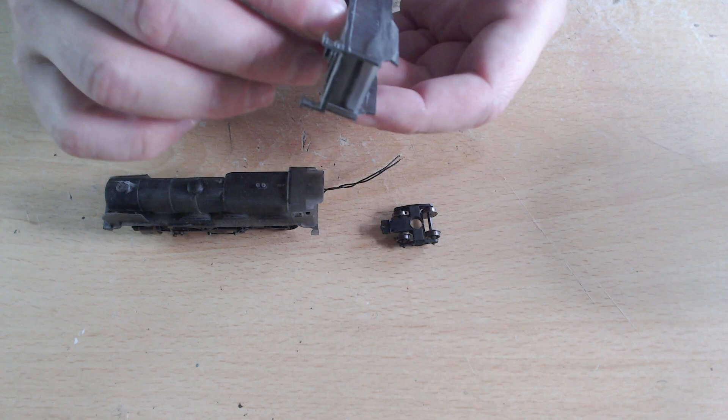This time we're working on a Southern Railway Lord Nelson class, which I've pretty much got ready here to start working on. It uses a Graham Farish 5MT chassis at the front here. I did remove the tender because we don't need that, and the tender is pretty much mostly its own thing. However, it does use some N Gauge Society bogies because it's basically might as well use pre-made parts.

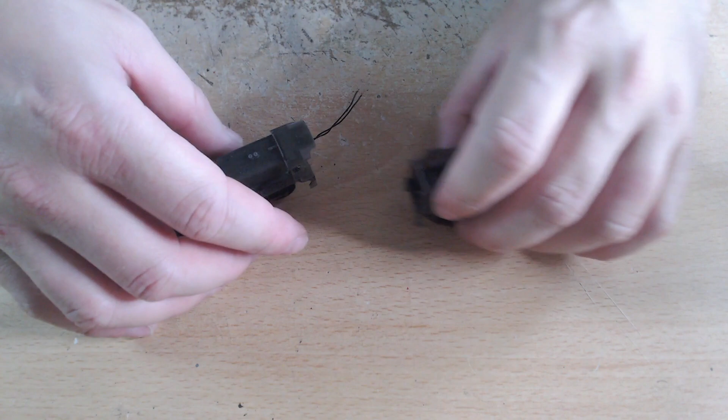However, I did need some N Gauge Society bogie pivots, but I haven't got them, so for now I had to make my own little pivots there. And yeah, that's most of it done. I do need to make little holders for the wheels, but I'll put that over there for now. But let's concentrate on the actual loco for the moment.

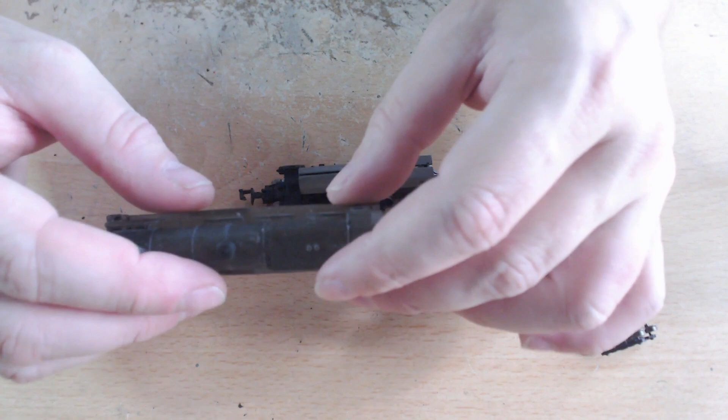But yeah, as you can see, I've also got some smoke deflectors. These are quite flimsy, so I may or may not offer them on the final build, but for now I have got them. And for the most part, it does fit on quite nicely, but you do need to do some work. First of all, we need to get rid of these little things here, so let me just get rid of that one.

I'll tidy that up in a minute. There you go, there's one, and there's the other one. We'll need to cut off two little bits down here, which I won't do with this because that's not the right tool.

Attach these wires somewhere because usually these wires will go into the tender and then connect the tender that way, and then the tender will connect back to the loco, but we're not doing that.

And one other thing which I need to do is see if we need to remove these little bits here. Just get something to point with. Yeah, these, I'm not too sure if they're quite in the way. If they are, I will need to trim them down a little bit on both sides. But if not, we can leave them as is.

But that is pretty much most of the work. Otherwise, oh wait, one other thing. We do need to put a tender to loco connection, which I'm just going to be using a standard pair of NEM couplings because these do come with little places where you put the couplings on. So I'm just going to use a little NEM pocket glued on there to connect to the tender.